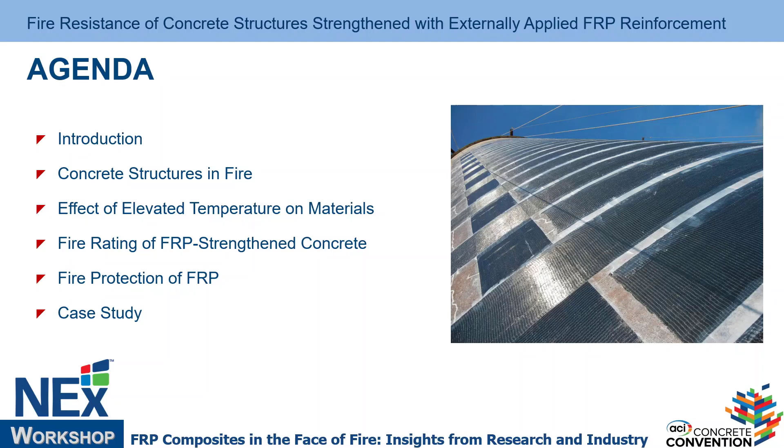And then I'm going to talk about the fire protection of FRP. How do we achieve that and what kind of evidence do we have for that? And if time permits, I'll do a quick case study for a project I was involved with that included fire protection of a structural element strengthened with FRP.

So now, why are we talking about fire today, right? Because fire is an issue, right? It's being considered as a structural load. And if you look at the statistics—this is only looking at approximately 10 years, and I think there are more updated reports that include last year as well—you can see almost every year for the past 10 years, we get close to 500,000 structural fires. Out of these, we get close to 3,000 deaths and injuries. And the cost, on average, is really 9 to 10...

Actually, if you look here, you can see the effect of inflation, right there.

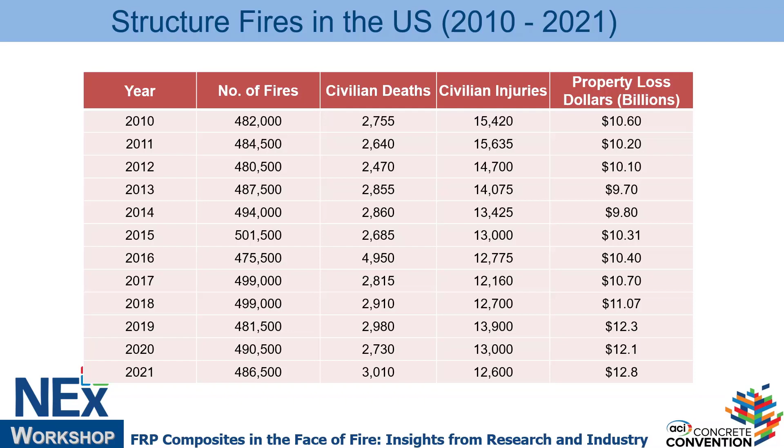But fires do happen, and do happen to structures, and over the years we've seen many of these fires. The good thing is concrete, as was mentioned earlier, is very good when it comes to fire. It has good fire resistance because it has inherent properties of providing insulation to the internal steel reinforcement.

Some of these major fires you probably heard about over the years: the Windsor Building fire occurred in 2005 in Madrid, Spain. It's a 32-story tower, and when the fire started around the 21st story, it lasted almost 24 hours. In those 24 hours, the only collapse you see in this photo is this part. One-third of the structure was made of steel, a steel frame. So the steel structure failed, but the concrete structure did not fail. I'm sure the structure was severely damaged.

Another major fire event is the Address Hotel in Dubai, an upscale hotel near the Dubai Mall. The fire occurred a little after 9 p.m. on December 31st, New Year's Eve. I remember it was in the news that year, and I got texts from people I know there—we have an office in Dubai—about the fire. It also occurred around the 20th level, between floor 16 and 20. It was an external spotlight, and a spark from the electric wire attached to it started the fire.

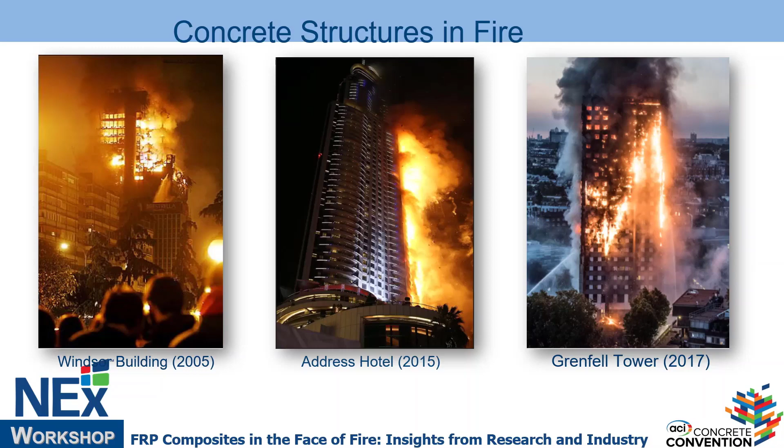So historically, concrete structures have been very resistant to failure during fire events. I think sometimes we underestimate how much fire resistance we get from these structures, and the calculation approach we use is relatively conservative. The only collapse I've seen over many years—I've done several investigations—every year there are two or three fire investigations I get involved with, as part of my work in repair and strengthening of structures.

Buildings, bridges, industrial facilities—I've only seen one failure due to fire a couple years ago, but it was a precast, pre-stressed element, so a less indeterminate structure. With bearing and corbels, once one element starts falling apart, you may get collapse. I'll show later that pre-stressed reinforcement in general is much more susceptible to fire, and I think this morning someone showed that relationship as well.

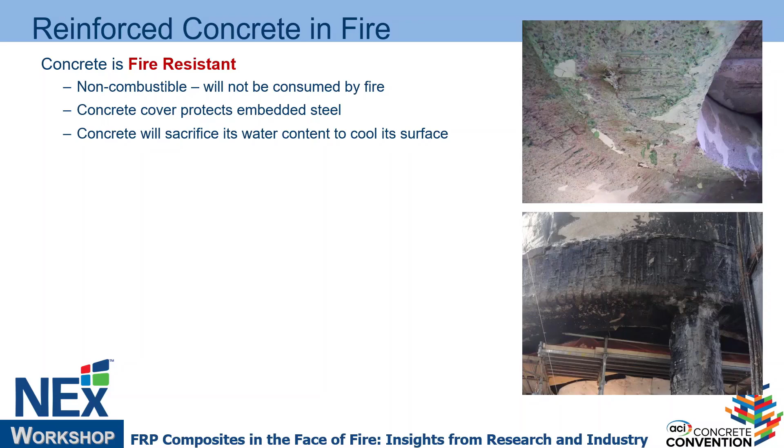So what happens in concrete? We said concrete is a very good material—durable, non-combustible, provides good insulation to the internal steel reinforcement and the core of the member. It can resist high temperature by sacrificing some of the moisture inside the concrete, some of the water used to create it, which starts falling apart. During fire, the concrete absorbs heat and changes the water into steam as it evaporates. That's a transfer of energy, consuming the energy that way rather than falling apart.

As the temperature rises, we can see the steam start building up. This morning we were talking about high-strength concrete versus normal-strength concrete.

As Steve Szoke showed in the video, about the explosive nature of high-strength concrete - it's so dense that moisture inside cannot get out. This creates so much pressure that it explodes the member. I've seen these tests over the years where high-strength members can explode under high temperature.

How do we address that? We put fibers in the high-strength concrete, polypropylene fibers. There was a question: how does that work? Well, these fibers, with elevated temperature, will basically disappear, burn, and create tiny micro chimneys that vent the hot steam from the element and reduce that pressure.

That's how they can last. But as the concrete starts losing moisture, it chemically changes and degrades. But degradation doesn't mean it's doing nothing - it's mostly just sitting there. If it didn't spall, it's sitting there providing insulation to the internal reinforcement. That continues until the temperature is so high that you get spalling.

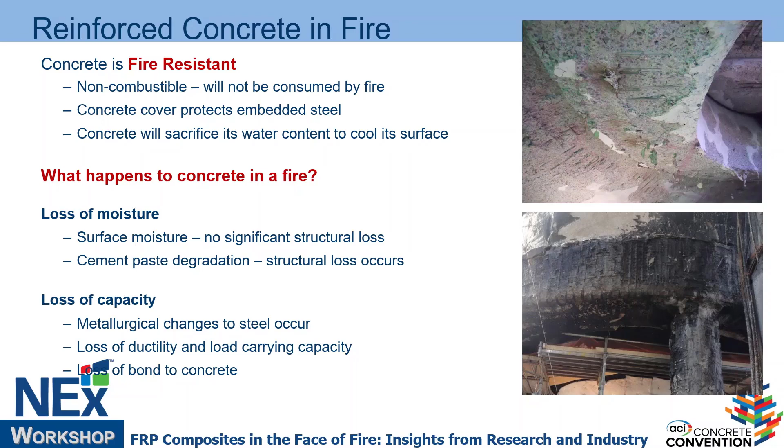We design based on what we call UL tests for service. I'll show you the fire load combination - ACI 440 for external strengthening and ACI 562 code. It's really based on a ratio trying to represent service conditions with dead and live loads.

Here are some of the fires I've been exposed to. You can see the damage is really not uniform, because fire is a function of the fuel. When you have concentration of heat, some locations may get significant spalling, other areas may see no spalling. So it varies a lot, and I think that's why concrete structures sometimes can last - the damage is not uniform. Some areas may still be adequately anchored and can last very long.

There's moment redistribution and different effects that give us some resistance. Plus, we don't have the full live load - even in regular days, we never really have full live load on a structure when we design for service.

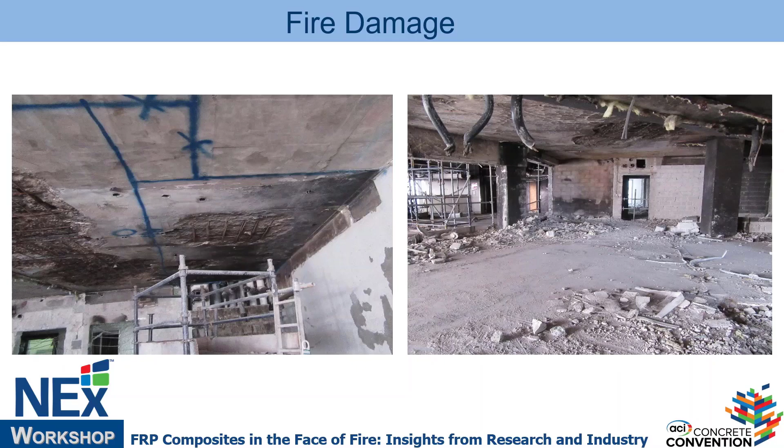But between these photos, one thing that's common - in most of these fires, the damage is more severe toward the top side. Why? Because heat rises. If you look at most of them, the floor is in pretty good shape. Actually, I've seen many structures where there's significant damage, but the floor is relatively in good shape.

This is actually in ACI 216 right now, which clearly states that the top side is not sometimes as critical as the underside. I mention this because it relates to something we do with FRP.

With FRP, if we want to do fire protection on the underside, we can easily apply spray material or boards. On the top side, it's not easy to fire protect FRP, because fire protection is typically a soft material, which doesn't make sense to apply on the top side, plus there's a change in elevations.

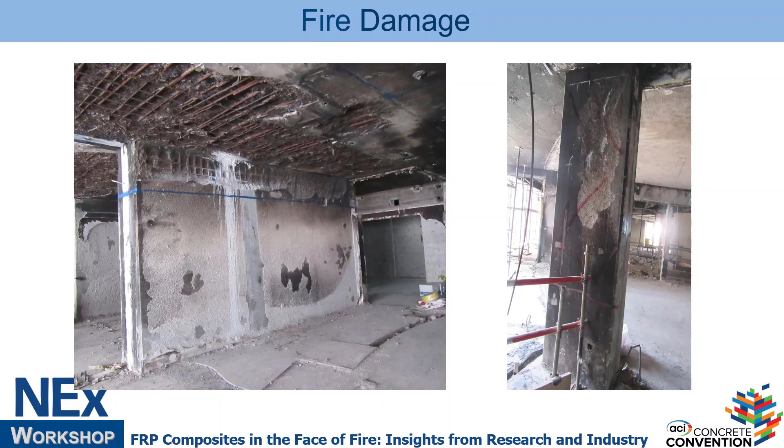I've seen many cases where building officials, based on ACI 216 and general knowledge about fire, accept that fire protection be limited to the underside, not required for the top side. Of course it differs between building officials, but you can see that's getting more acceptance now.

Another part, which I'm not going to cover, but typically when there's fire damage, before you can go back to the structure, you have to do an investigation. If FRP exists on that structure, we typically assume it's all gone.

It's doing nothing, it disappeared. So part of the repair is basically addressing this damage, and you may still have to do repair and strengthening again if you want to go back to the same load level.

There's a lot of details for the assessment part. Chapter 10 in 562 talks about fire, and we included both investigation after fire and describing that investigation. We're going to elaborate on it, but typically what you do after the fire is try to identify the extent of the fire damage, the depth of the fire damage, and the material properties.

Some basic things: you can do hammer sounding to see how far the delamination extended into the concrete, because sometimes the concrete looks good, but due to expansion of steel reinforcement, you get separation.

You can do a drill probe, where you basically drill vertically, and when you start hitting resistance, that tells you the depth of the damaged concrete that needs to be chipped and removed.

You can take samples of the steel and test them to verify residual capacity if you're planning to keep the steel. And you can do cores, take cores and do petrographic analysis to figure out the depth of the damage if you want. Although in my experience, just simply doing the sounding and the drilling can give you very good indication of the depth of the concrete damage that you need to address.

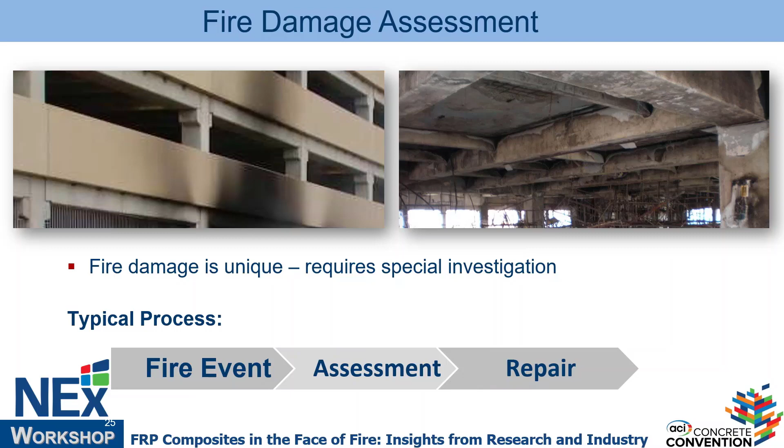Okay, so let's go back now. I said we're going to try to connect the dots in my presentation and see how we deal with this issue of fire and fire protection of FRP reinforced elements.

ASTM E119, the standard fire curve that we use. I apologize, I know I'm going to be mixing units because anything related to fire is most of the time based on international units. In the US we sometimes convert some of these. I'll try as much as possible to provide conversion, but sometimes you just need to look at the relative value and focus on the concept, because some of the stuff here isn't 100% detailed, but I wanted to use some figures to explain concepts.

So this is ASTM E119. There's the ISO curve used in Europe, very similar to this. Canada uses a similar curve. I think someone this morning showed a presentation on this - it's considered relatively on the conservative side, almost like an envelope.

So that's why with E119, it's really very unlikely to get exceeded. It can exceed it if you have too much fuel - it's not absolutely conservative, but it's conservative most of the time for typical structures. You can see here, I mentioned earlier, within 7 minutes you can hit 1,000 degrees - that's the standard temperature in the fire. And if you have something external, it may ignite if this temperature exceeds its ignition temperature.

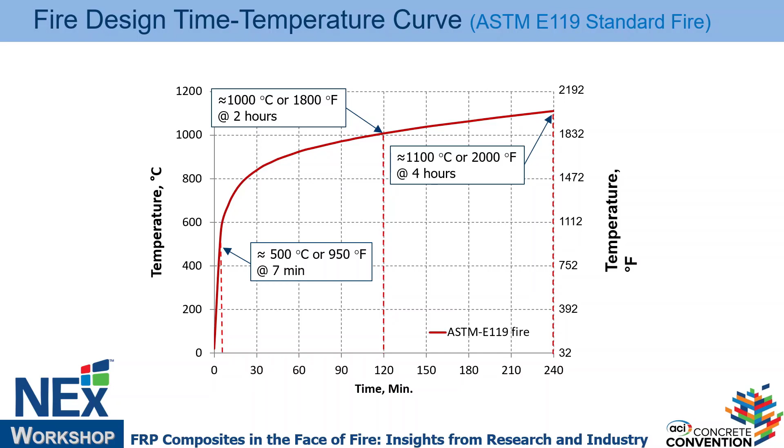At 2 hours, 120 minutes, close to 1,000 C, which is 1800 Fahrenheit, and after that it really doesn't increase significantly, going to close to 2000 Fahrenheit or 1100 C by 4 hours. I think there was a description this morning, probably Steve, who said that most structures require between 1 and 2 hours, which is true. It's very rare to see a requirement for 3 hours - some elements or structures may need it, but typically it's 1 to 2 hours. 2 hours is what most architects put on structural drawings, sometimes even without checking the code.

So what happens to the materials? We're going to look at how they behave, and then try to take all these data points and connect them together to understand overall behavior.

This is something I listed here that comes from Eurocode. This is an older version, so I don't know if they've changed it - I hear from our colleagues in Europe that they keep changing it, there's a new version. However, look at the concept here: at 20 degrees C, there's a certain behavior.

Oh sorry, this is the concrete. We start with the compressive strength, you get to the peak - this is what we call F prime C - and then after that you get failure. As the temperature rises, the compressive strength starts falling apart - you lose strength, you lose stiffness of the material.

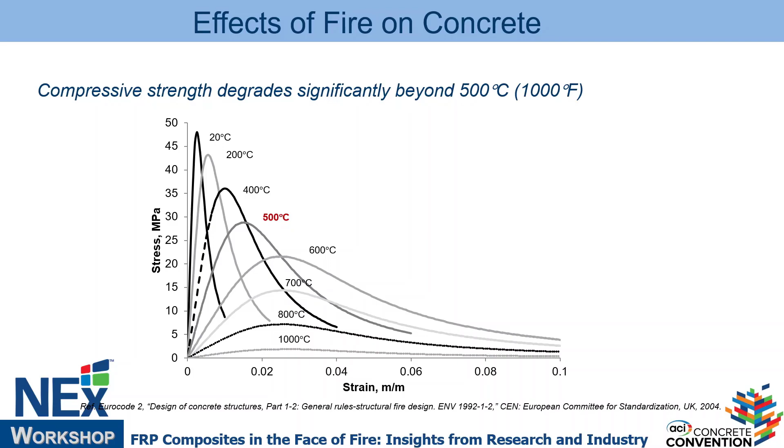So that keeps happening with the concrete, and there are different curves used to represent that. This is the curve I'm going to show next, from ACI 216, and this is going to change a little bit because, based on my experience, I've seen evidence that concrete starts degrading at a lower temperature than what's shown here, which is close to 500 C. At 200, 300 C you can see signs of loss of strength, and I think the new curve in 216 will show a little more aggressive loss of strength in concrete.

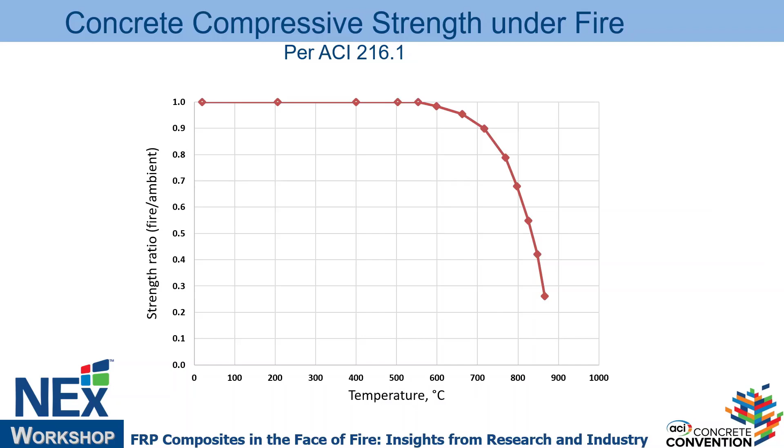That doesn't mean when I have that temperature that the entire cross-section of the element is falling apart. It depends on the temperature. So if, let's say, the outer 1 inch or 25 millimeters of the concrete reaches 500 degrees, that means only that outer inch is not contributing to strength, not the entire section. And that keeps going with time. So the temperature profile through the cross-section is important to understand, because it gives an idea of what level the remaining residual section has adequate resistance during fire, and which section is falling apart.

Now let's look at the steel bar, similarly. I know it's a little aggressive, but assume a linear stress-strain diagram, and after that a plateau, and then there's a hardening I'm not showing here. This is the yielding, what we define as yielding, at ambient temperature close to 20 C.

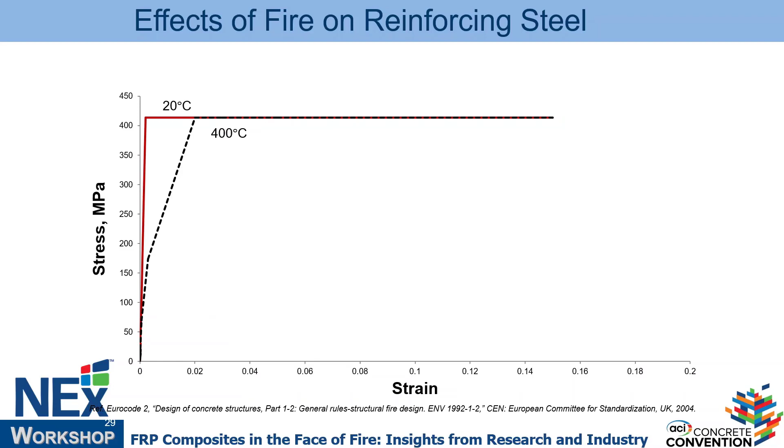Then it goes to 400 degrees. I start losing stiffness; strength doesn't degrade a lot, but then both strength and stiffness start dropping as I reach 500 C. The general rule is around 500 C plus or minus, or 1,000 degrees Fahrenheit, 1100 in some cases some people say, you lose close to 50% of the capacity of the steel.

Why is this considered critical? Because in general the assumption is 50% is the minimum you need to at least support the dead weight of the structure, so that's why it's considered relatively critical. Then at 600, 700 degrees you can see it start falling apart.

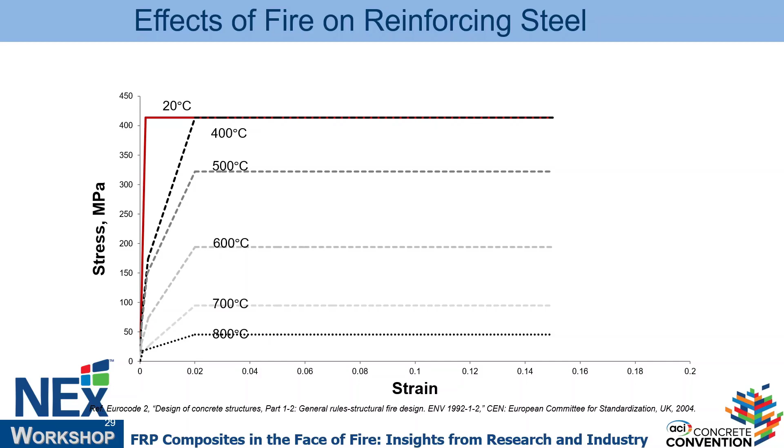If I take the peak of each of these data points and try to plot it again, I can get the curve that represents strength degradation with temperature. So this is percentage of the yield strength. Let's say it's 60 KSI, 420 MPa steel. Start there and start dropping as the temperature rises. This is mild steel reinforcement.

But what that tells me is if I have a tool or way to determine the temperature of the steel bars within my cross-section, I can determine the residual strength after 1 hour, 2 hours, or 3 hours. And if I know that, I can calculate the capacity after 1, 2, or 3 hours of fire exposure. So this is a very important piece of information. That's why 216 is updating all these curves, because you need them to do what we call rational analysis, rational calculation for fire rating.

And if I look at pre-stressing steel, it's a little more aggressive. Again, there are many different curves within different codes and research. This is just to represent the typical trend, because when we pull the high-strength steel, called a strand, let's say the 7-wire post-tensioning strands, that changes the molecular structure a little bit and makes it more susceptible to fire. Add to that, most of the time at service they're under stress.

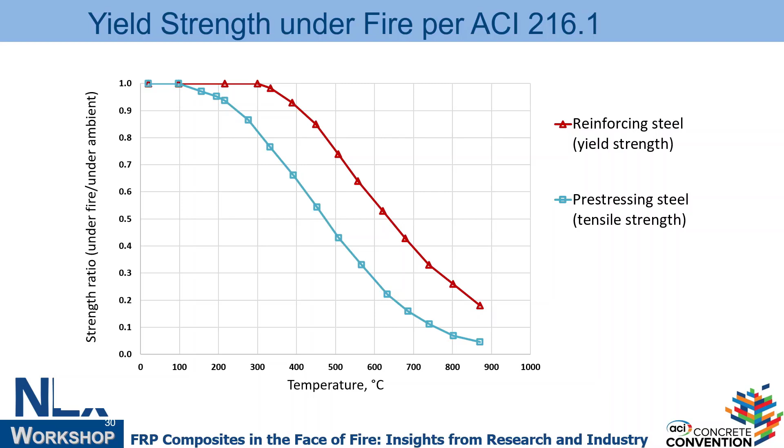It may not look significant, they're close to each other, however it is really a big difference. If you look at, let's say, 600 C, while the steel is close to 50%, the pre-stressing steel is close to 30% plus or minus. So that means it degrades much faster for the same condition. That's why, for me, I never understood why the concrete cover is the same for pre-stressed and reinforced concrete, because if I do thermal analysis, I'll find they degrade faster than this.

So what happens is I put all these elements together: concrete section, reinforced, exposed to temperature, the temperature rises with time. What happens is I lose the concrete outer layer by layer in terms of contribution. Steel bar temperature rises, so the strength keeps dropping, and I have the same level of load. So as the section capacity drops, what's going to happen is basically the stress within the member or the materials starts increasing to a level at some point.

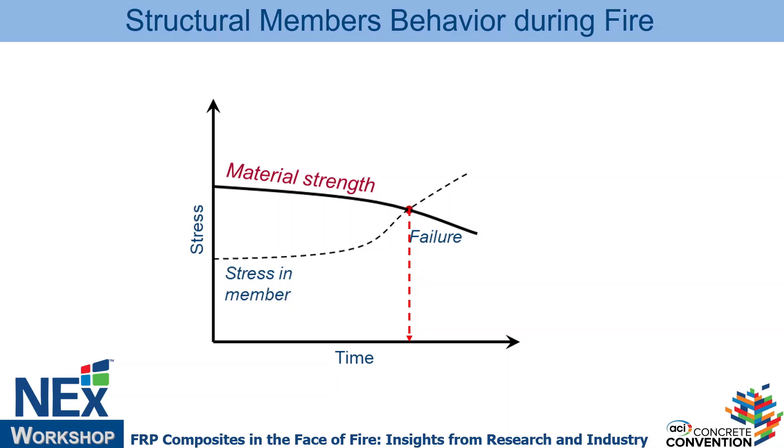The external load effect is more than the internal reduced capacity. In fire, we always talk about reduced capacity. At that point, you get collapse of the structural member. That point where it collapses is what we call the fire rating. So fire rating is the point at which the existing structural element will fail. That's typically what's referred to as fire rating.

Now, the good thing is steel recovers part of its properties after fire. I don't know what the new curve in 216 looks like, but this is some data I pulled from available references. You can see that steel, up to 600-500 degrees, after it cools down, gains back its strength, and most of the time it's above 70%. So in my head I always say, if I don't know, worst case I'll assume 70% unless we do some testing and verify the capacity.

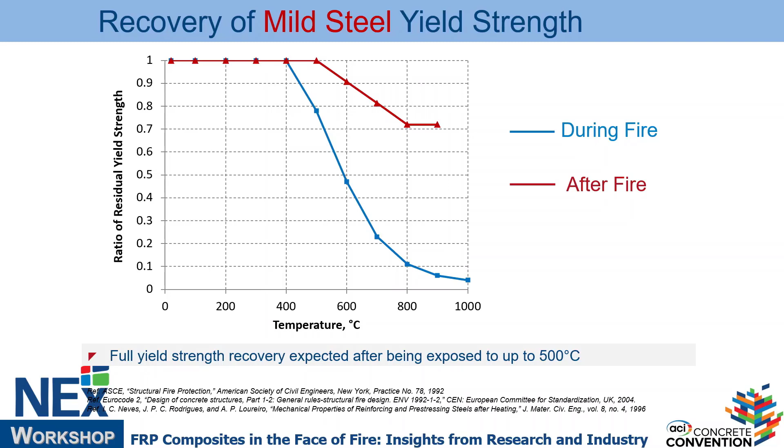So during fire it drops, and when it cools down it gains back strength. Actually there are some curves for concrete too. Even concrete, when it cools down, sometimes gains back some strength - it actually hydrates again, starts absorbing moisture from the air, and there is a strength gain. But that takes a year to happen. Most of the time, if there's damage, you start repair immediately - nobody's going to wait a year to figure out how much the concrete will gain. You immediately start chipping back the concrete and doing repair and strengthening.

Okay, so that was a quick intro to the general concept, and how I'm going to connect all these dots. Now I need to look at FRP - there was some discussion about it this morning, and I'm just going to try to connect these dots together. How many people here are familiar with FRP? Okay good, at least 50-60%.

For those of you who are not very familiar, FRP is fiber reinforced polymer. It consists of fiber woven into fabric, or just loose fiber. You can use carbon, glass - there's basalt fiber, there's aramid fiber, but these are the most popular for structural applications. These are mixed with epoxies where you saturate them on site and glue them to the surface to create this cured-in-place, high strength polymer, very durable, that increases the capacity.

That's ACI 440, and its mission is to promote and develop design guides for these components. There are also pre-cured laminates where you just put epoxy on it and stick it, similar to the concept of steel plates. Or there are anchors and bars that can also be used. This morning, Dr. Kodur talked about NSM, near surface mounted reinforcement - that's where you cut grooves into the concrete cover and then glue in the carbon bar, providing near surface or surface embedded composite reinforcement.

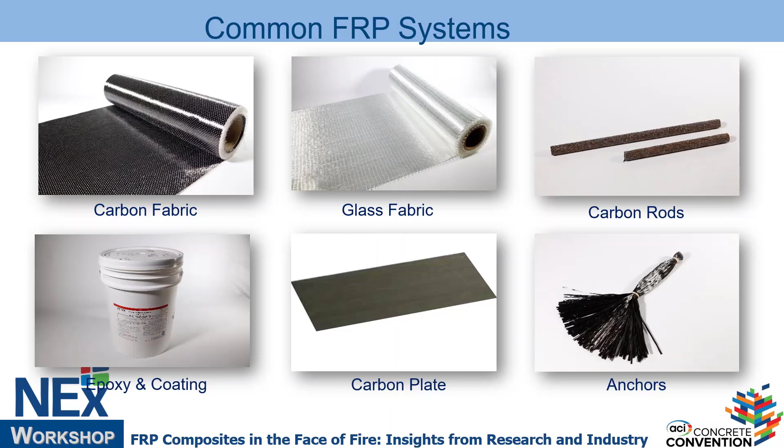So these are the materials - a lot of applications, right? That's why we're talking about it, because 20-some years ago it was considered new technology, even though it started almost 40 years ago. Development and research in FRP began in the 70s. Now we do them for seismic strengthening for walls, we wrap columns to increase ductility, shear strength, axial load, and use them around penetrations.

So this slab is planned to be cut, maybe for a new duct going through it, so they put FRP to reinforce around this penetration to control the cracking and make up for any loss of steel - shear strengthening of beams and columns by wrapping. FRP can be on the top side of the slabs or on the underside of the slab - they're all different configurations.

The nice thing about FRP, why it's gaining popularity, is that it's basically a flexible material that can easily accommodate any shape. You do not have to use heavy equipment or machinery to install it. And for repair and strengthening, it really doesn't add much geometry, so it's easy to hide and to protect.

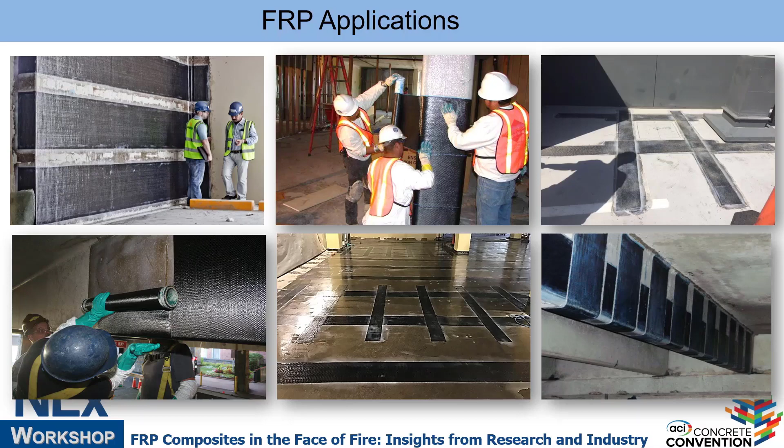So all these applications require evaluation of fire. If we look at the fiber, not the composite, just the fibers - the glass fibers and the carbon fibers that are used - if you look at carbon fiber, you can see it can actually go to 800 and even 1,000 degrees. It can turn red like steel and would not lose strength. It's very resistant to high temperature - it's actually made under high temperature.

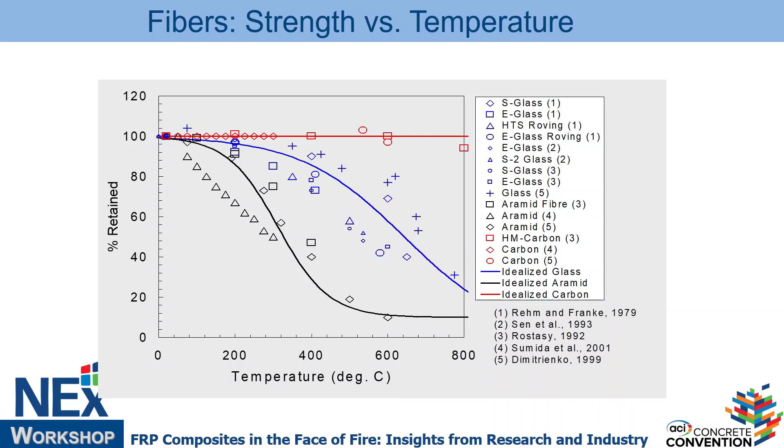If I look at glass, the fiber itself is actually weaker under elevated temperature. But this doesn't really matter, because we take these fibers and embed them in epoxy. The epoxy is the main component that transfers the load between the fiber and the surrounding structure, so the epoxy is the weak link. When I put these things into a polymer shape, the behavior will change, right?

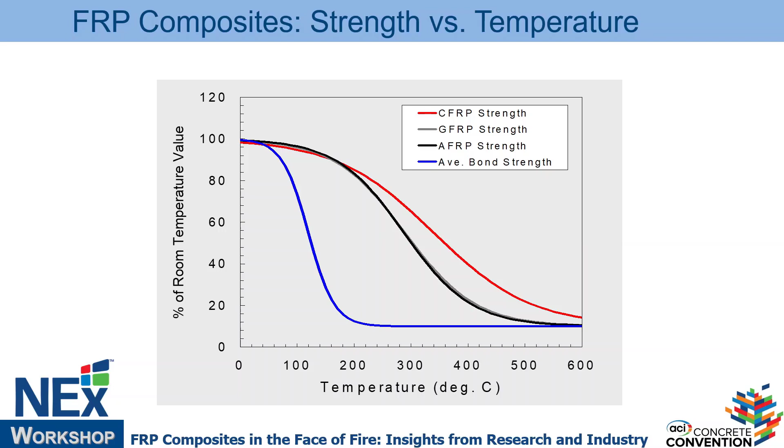We were talking this morning, Scott was asking, what is a critical temperature? That's really something we're trying to understand, because if I look at the behavior of the composite, it loses strength gradually. So is the critical temperature when it loses, say, 50%, somewhere close to 300-400°C, or is it something else? We keep talking about the glass transition temperature, but I agree this is not really a good definition for when materials start losing strength, because it's not a sudden drop in material properties.

Okay, so I learned this about materials, I learned this about the FRP. How do I apply this to look at the fire rating? ASCE 7, and currently also ACI 562. It's also going into ACI 440S, which is the code for externally applied FRP that's in progress.

There is a design limit or load combination for fire, which says during a fire, your element with its reduced capacity is supposed to support 1.2 dead, 0.5 live. If you have a roof, maybe you add another 0.2 for snow. Otherwise, you stick to 0.5 live. So during a fire event, I'm not expecting the full factored load.

When I compare this for anybody external, this is basically in the US. I don't know if it could be different elsewhere. I know other codes and standards, like New Zealand's, may have different load combinations. This could be 1.1 or 1.0, and this could be 0.7, but it's always close. Basically reduced, it's dead loads and some portion of the live load, because during a fire we do not expect the full factored live load on the structure. It's an extreme event, so we're trying to design for what is the expected load on the structure.

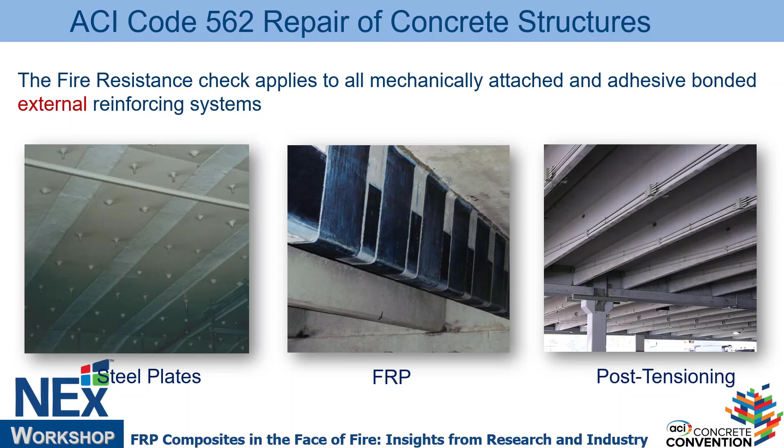I've run calculations for some columns that achieved 8-9 hours of fire rating. Basically, even if you increase the loads on it and lose all the external reinforcement, you still have adequate fire rating because it drops, but it's still adequate. Okay, how do we deal with FRP?

If I have FRP reinforcement, the steel strength will drop, so I need to use reduced strength of steel and reduced strength of concrete. Let's say I'm doing shear assessment, not just flexure. FRP, we ignore its contribution to strength. That's very clear currently in ACI 440 and also in ACI 562, the repair code. You ignore the contribution of the FRP.

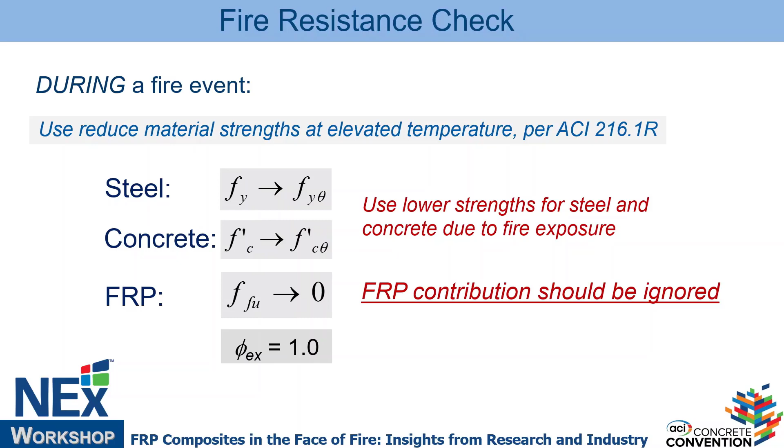Until we come up with FRP that has epoxy that can resist fire, we're going to ignore it. We're going to be super conservative. We're not going to look at critical temperature or Tg or anything else, and of course the phi factor, reduction factor of 1.0.

Okay, now I've learned the basics, and I know what I need to compare to figure out my fire rating. How do I run the calculations? We're going to go through this as a way to explain it visually. If I have a beam, I'm assuming simply supported beam, applied to uniform load.

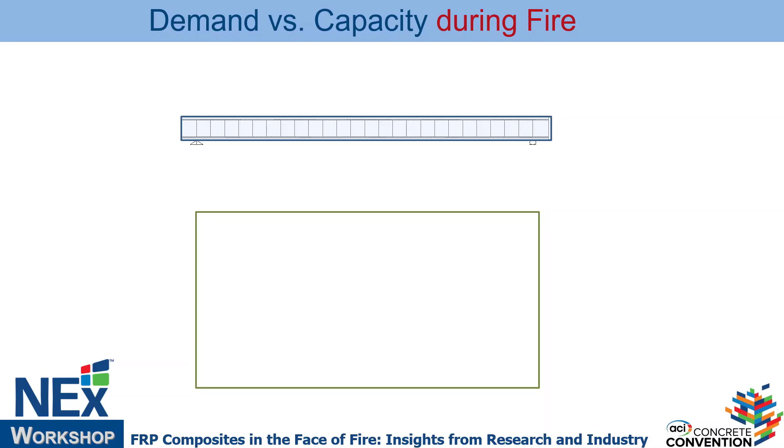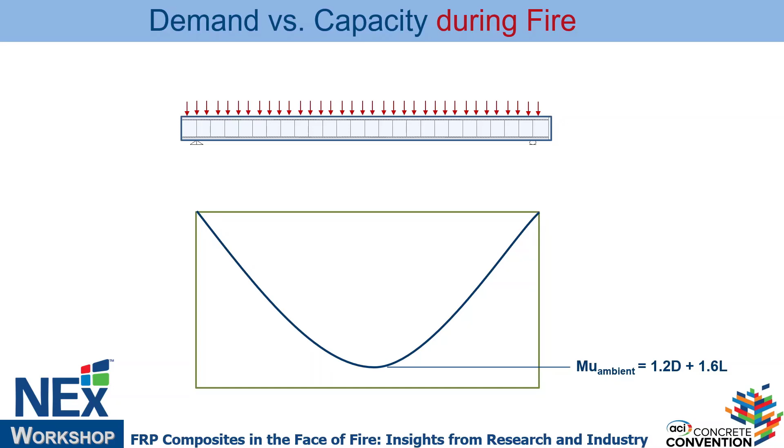So we know all what to learn from school, WL squared over 8, that's the maximum moment at midspan under factored load. I'm going to determine this based on the load factor. Doesn't matter which country you're in, you have your own standards and load combinations. This is the moment, factored moment diagram, applied to the member, maximum moment at midspan.

And I'm going to provide capacity, provide steel, and design it to give me capacity greater than this demand. Now, sometimes we cut down the steel a little bit, but I'm assuming I have the same amount of steel, so I have uniform capacity. Ambient temperature, this is what we design for every day.

What happens during fire is that the temperature rises. I lose, could be some concrete section, but more important for flexure is the steel - what matters is the steel temperature will rise, its yield strength will drop, so my capacity may drop.

However, I do not compare to the factored load, I compare to a different load combination, a lower load combination. So as long as my reduced capacity is greater than this load combination due to fire, and I have the benefit of the reduced load, and also I have no reduction on the material - that's another gain - this means I have adequate fire rating.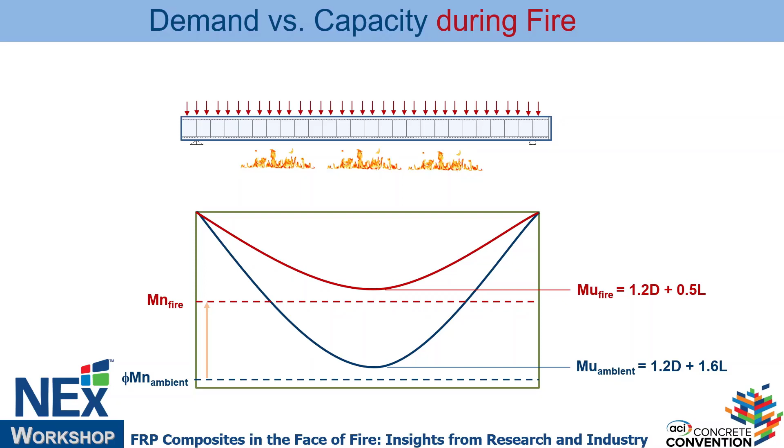But it doesn't happen all the time. If this drops, then I don't have adequate fire rating. Okay, how do I figure this out? That's mean to do this, I need to determine the temperature of the steel so I can figure out the strength of the steel, so I can plug it into my shear or flexure capacity calculation and figure out what is the capacity.

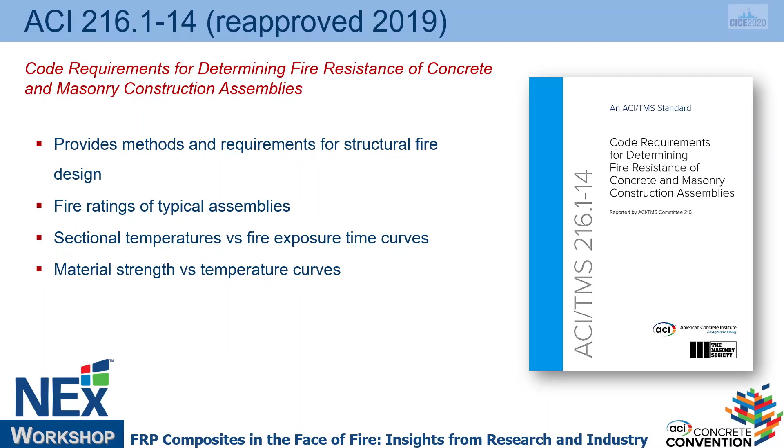We have data available in ACI 216 that can help us with this. It gives us the relationship between temperature and strength, and also the relationship with the temperature profile within the cross section. I'm going to jump to it and show you. This is one of the charts in the current 216. These are improved, and now we're adding calculations too - correct, Kevin? We're adding calculations that help you calculate the temperature, not just profiles that you can see.

So this is one of them. This is intended to be for a slab. I'm just going to use this for a simple example. Most of these charts are based on the distance from the outer surface to the centroid of the bar. We don't look at the cover, we look at the distance to the centroid of the bar - that is the depth of the rebar.

So let's say I have a slab and it's approximately 1 3/16 inch, 30 millimeters. At 2 hours, that means the bar temperature is probably close to, let's say, 1,000 degrees plus or minus, 1,030 shown there, or close to 550, 570 C. So these charts can help you figure out the temperature of the bar. I'm going to use that later on, so keep that in mind.

Another way to do it is thermal modeling. And I know we talked about this morning, and Dr...

Kodur showed all these models, but it's not that complex anymore. I just purchased thermal modeling software. You can just draw the cross-section, define the material properties, thermal properties, important to know.

Apply external temperature, could be one side or two sides, ASTM E119 could be a standard, and it will calculate for you the temperature profile at any time. I can model any beam within an hour, a couple of hours. It's not complex.

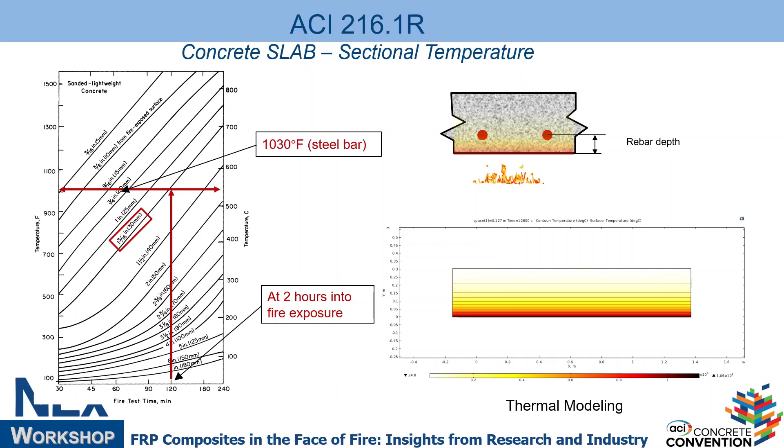This is another one. These are some of the charts for beams, for example. This is looking basically at a small section, let's say a small quadrant or quarter of the beam, that gives you, based on the time and temperature, the ability to figure out the temperature profile.

So if I have a bar, for example, at this location, it would be at 900°C after 2 hours, 120 minutes. So I have ways to determine the temperature of a corner bar, maybe middle bars.

I can also do the thermal modeling, applying the external ASTM E119 curve I showed you, which would tell me the temperature of each of my bars at any time - 30 minutes, an hour, 90 minutes. I can figure all that out pretty easily.

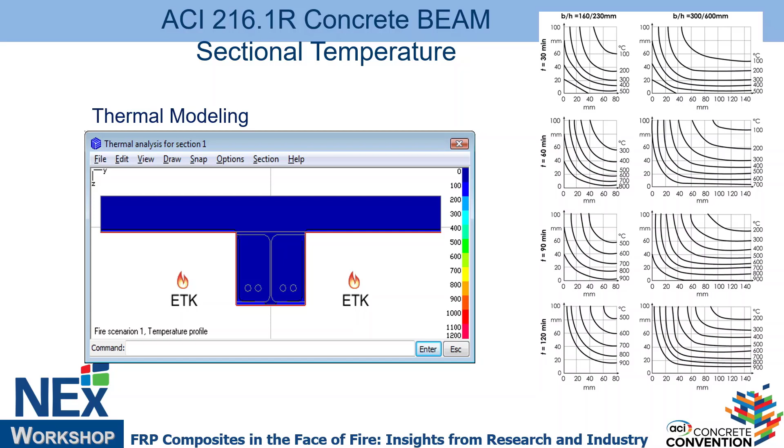If we understand the thermal properties that include thermal conductivity, specific heat, mass loss, density - if you get these parameters and there are ASTM standards to do them, then you can do any modeling or analysis that you need. I've done this on multiple different tests where they have data, and you can match them pretty good.

So this is to answer a question. Did Amir answer the question about how you transfer the information from a UL test to building officials? The idea is to move away from the concept that you have to do a test to verify the fire rating. We have the tools to theoretically calculate the capacity.

So we can simply run the model. All we need to do is convince the building officials that the models are adequate and can be used for analysis. That is the missing gap.

How are we addressing that? By working with 216, like 440 - I'm involved with 440, we're pushing 216, and 216 responded to the need of the industry, updating the guide to provide a relationship, and also working on a separate task group for a rational design document to describe all this and provide examples. And then this is going to 216.

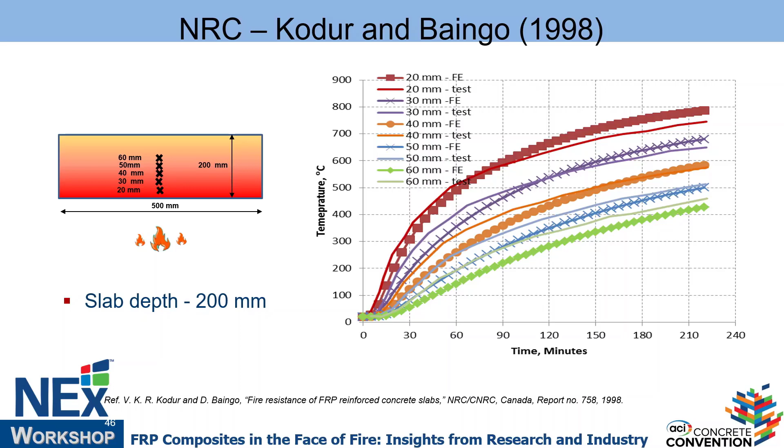With steel manufacturers, sometimes they test lots of elements. We cannot do that with concrete. We don't have a standard shape. It can be unlimited shapes because of the layout of reinforcement, the geometry, the concrete strength. There's no way we can do enough tests to cover all the potential applications for concrete.

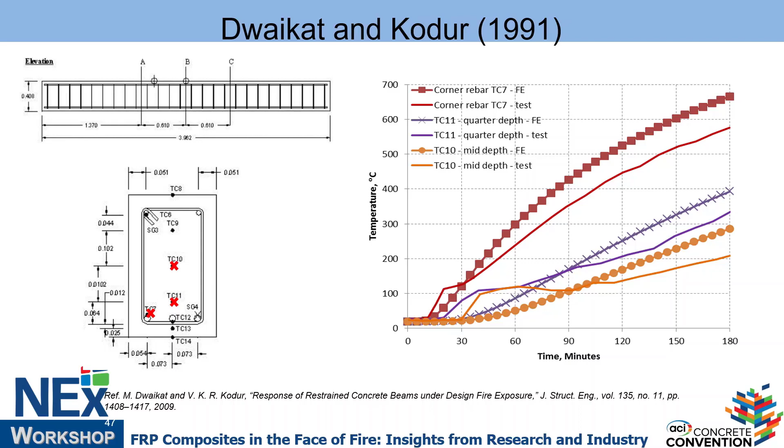There's another test also showing the same thing. Actually, theoretical is most of the time a little bit above and considered, at 1, 2, 3 hours, slightly more conservative, which is okay. For a designer, being slightly more conservative, I'm okay with that.

One thing I want to bring to your attention with this chart - this is a modeling for a beam, for a corner bar versus a middle bar. I think Dr. Kodur mentioned this: a corner bar is exposed to heat from two sides, so the temperature rises faster, which means it degrades faster.

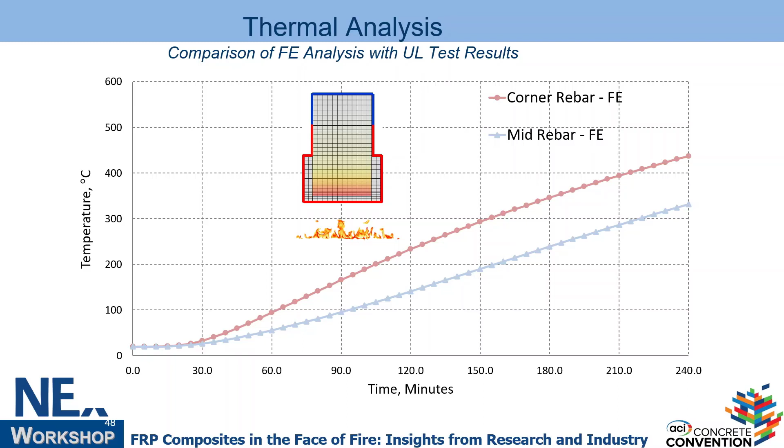While a middle bar, or really a bar in the second layer, is different than the first layer. So when you do your calculation, you have to determine the temperature of each bar and sum up each bar's contribution to the capacity. That's also important.

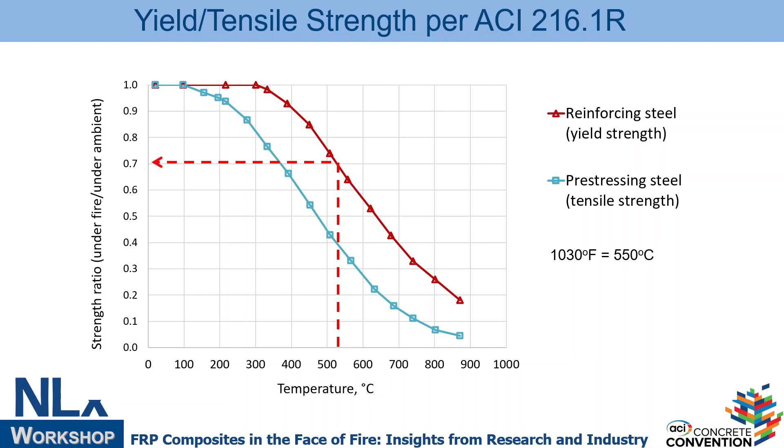So now, we looked at that slab, for example, and the temperature was close to 1,000 degrees. Now what do I do? I have these charts available in 216. Based on that temperature, I can figure out the residual capacity. If I started with 60 KSI, 70% is 42 KSI, or 420, 70% of 420 is 294 Megapascal. Now I know the properties of the steel and the concrete.

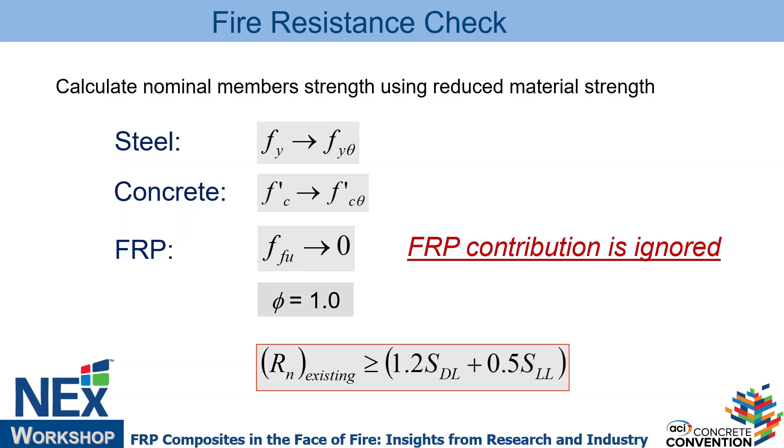I'm assuming if I'm looking at flexure, the concrete, even if it's a little bit weak, doesn't matter because the top is in compression and it's cold. It's not going to affect me a lot. Negative bending may be different. I'm just looking at the example with a simply supported beam. Ignore the FRP. I can run the calculation with reduced capacity, no phi factor, and compare it with the load combination, 1.2 dead, 0.5 live, and determine if it's adequate or not.

So this chart that we looked at, what if I do this without FRP strength, and I found that it's inadequate? Well, that means I need fire protection, right?

Now, why does this happen? Because there are two components to the equation: I have the capacity and I have the loading. If we're using FRP to repair, we're not increasing the load, so maybe sometimes it will pass. But if I'm doing strengthening, I'm adding dead load and possibly live load, or live load and possibly dead load. So I'm increasing the demand.

When I increase the demand, I lower the fire rating. That's why, within 440 and 562, we're thinking we need to address the fire, because when you increase the loads on existing geometry, you're basically playing with the fire rating. You're reducing it, and you have to address it somehow, and we need to run calculations. If the capacity I found is lower than the demand, load factor demand during fire, which is 1.2 dead plus 0.5 live, that means I need fire protection.

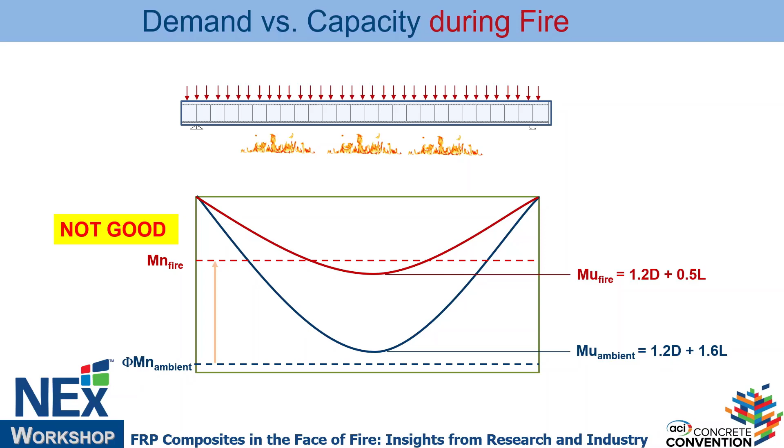Okay, how do I do that? Well, almost all manufacturers of FRP now have a fire protection system that was tested UL with FRP. This morning, Kodur showed the product that he tested for. We have systems tested for V-Wrap, Simpson has one, Sika has one. So it's now not something that is not available. It is available and can be used to address the fire rating.

It's either cementitious, most of the time spray applied. I think some of it can be troweled on. But the idea is we're using a material that has much lower density, so there's more air in it, more insulation, and that's basically going to provide protection. That protection is not aimed at protecting the FRP. It's aimed at protecting the steel and the concrete. That's an important thing to understand.

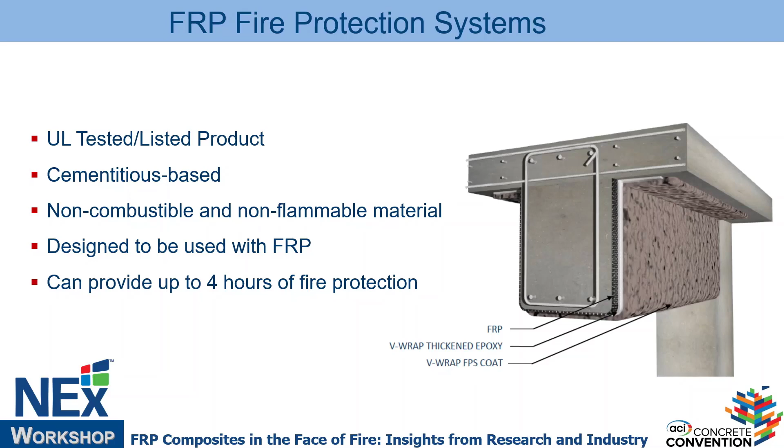And when we're doing the strengthening, we're doing strengthening and then fire protection of the system, not of any individual components. Sometimes people keep talking about fire protection and FRP - is FRP going to stand fire or not? We don't care, because the code says ignore its contribution. And that's what we're doing.

So, can I model this? Yes. If you do a test, ASTM standard test, on that fireproofing material to determine thermal conductivity, specific heat, mass loss, density, then you can go to any software, add an additional layer, assign it these properties, apply ASTM E119, and you can still calculate the temperature of the steel, which will improve with the fire protection.

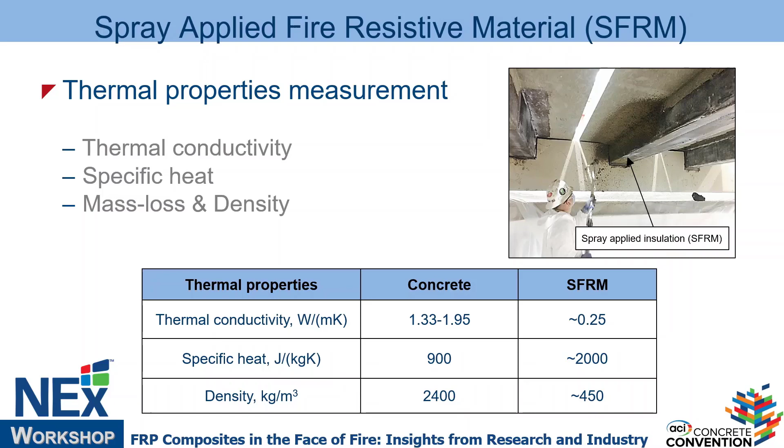This is one of the systems that we use, and you can see most of these systems have much lower properties. SFRM stands for spray applied fire resistive material. Thermal conductivity, you can see it's much lower. Specific heat is higher, which means you need more energy to heat the elements, so it's a good thing to be higher. And the density is much lower because there's lots more air in it, and air is a good insulation. Materials that provide insulation, like vermiculite and others, are embedded within it.

So here, for example, a test - this comes from a UL test - shows the temperature of the steel bar with and without fire protection. This is without the fire protection system, 600 C, this curve in the middle. While the lower one drops to less than half the temperature, 260 C. And that's what matters, because if I get this temperature low enough, sometimes I can even maintain the full yield strength after 2 hours and 3 hours.

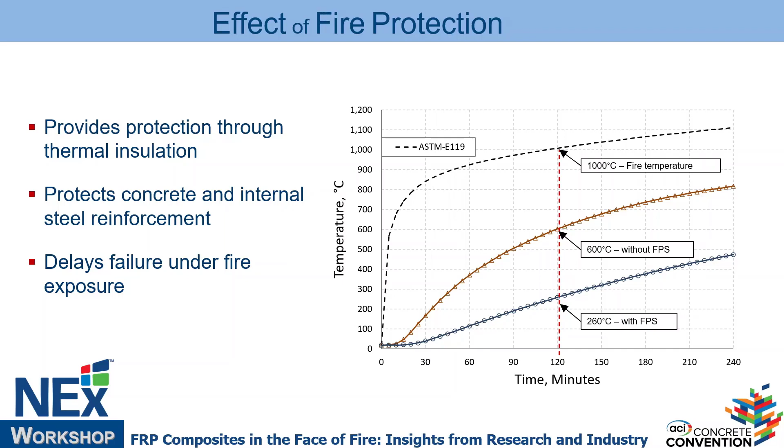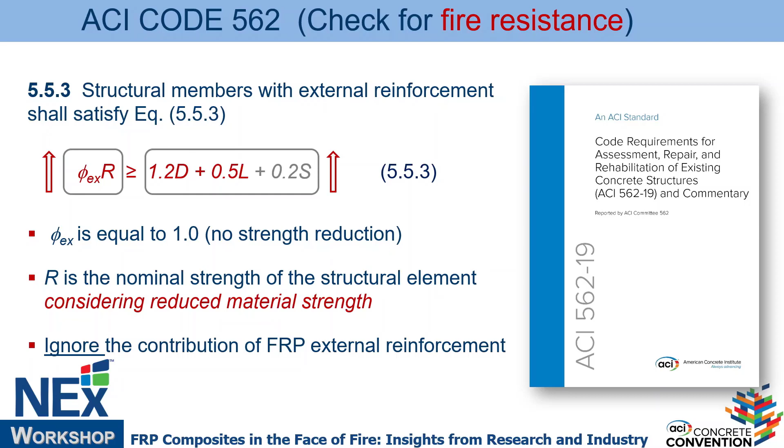With this system, you can see from most manufacturers you can get almost up to 4 hours of fire rating. It does work, because we're addressing the concept of protecting the elements. I'm basically increasing the nominal capacity during fire by protecting the steel and the concrete. But I have to keep in mind, even though I'm increasing the capacity, the demand may be increasing if I'm doing strengthening. So I have to check both sides of this equation.

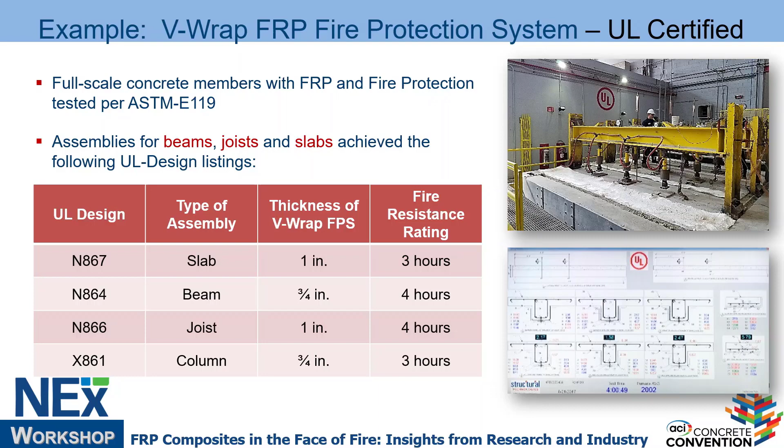This is one example, this is a system I mentioned. 1 inch, 3/4 inch can give you up to 3 or 4 hours. Some of these tests at UL, we actually instrumented them with thermocouples at the FRP location. The concept is we needed this as a data point to show building officials that we can predict the capacity. We don't need to do the test all the time.

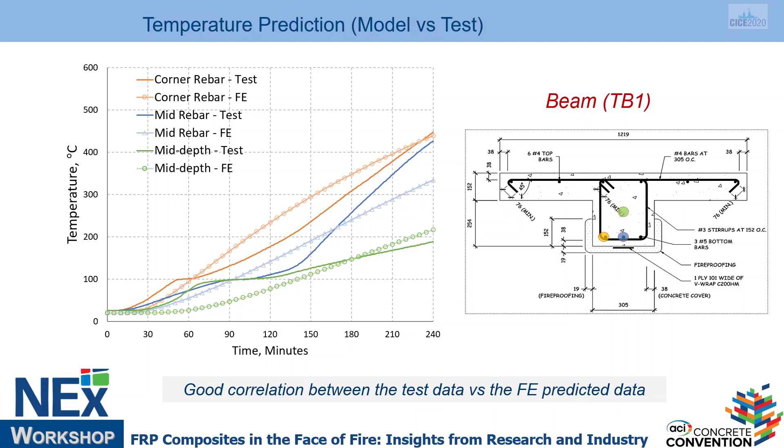So you can see here the thermal modeling, and again the lines are not exactly on top of each other, but relatively good accuracy. It's actually more on the conservative side, and we can use this to calculate the capacity. This is from one of the beam tests, to give you an example.

Again, I apologize, this is in US design values, but look at just the concept here rather than the actual value. I had the original capacity, 62, with the addition of FRP it was increased by 25% to 78. Then the fire load per E119 was 56, which we said corresponds to service. Service is roughly 70% of the ultimate, because if you look at load combination, US 1.2 dead, 1.6 live, assuming they are both equal, the average is 1.4. So basically the service is 1 over 1.4, which is roughly 70%. Of course, if you have the ratio of dead load higher or lower, that affects this ratio.

So what happened is that after the capacity was predicted, without fire protection it's 32. With fire protection, by modeling, it's 57. And the load was 56. So that means it would last 4 hours theoretically. And it did, it did last for 4 hours without failure.

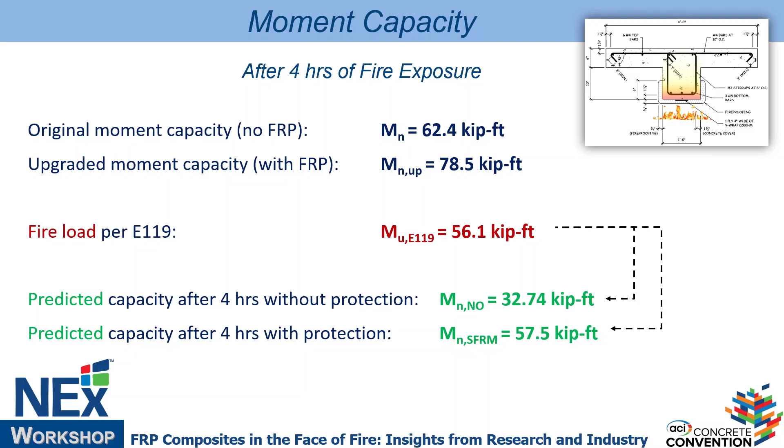Now, we don't know how far, because it's very expensive to do the UL test. Every minute costs a lot of money because of the amount of fuel. Once we reach 4 hours, it gets stopped. Could have lasted more, 5 hours, 6 hours, or could be just 1 minute after 4 hours. We don't know, but it passed. So the theory does work, every time we apply it.

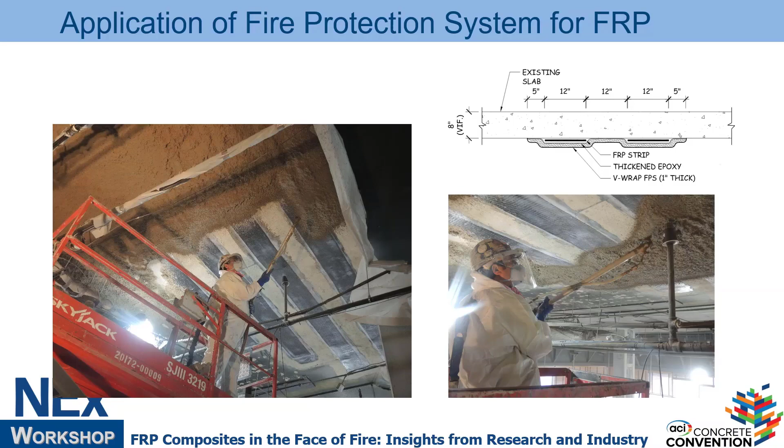Fire protection system, most of the time, it's mixing different cementitious components with water, and you can spray apply it. You apply it to the FRP. I mentioned the thickness between 3/4 inch and 1 inch, so it's not a significant change to the structural element, but it's enough to provide adequate fire protection. Here's some photos of elements that have been spray applied with fire protection.

Now, what if with all this fire protection I cannot make it work? Well, maybe then FRP is not the right solution in this case. One thing to mention is ACI 440 has a limit on the strengthening, to keep FRP as what we call supplemental or secondary reinforcement. That means we're only increasing the capacity by plus minus 40%, depending on the dead load to live load ratio. So most of the time we're not increasing the load significantly, and that's why if we have reserve in fire rating based on detailed calculation, it may be okay and you don't need fire protection for the FRP.

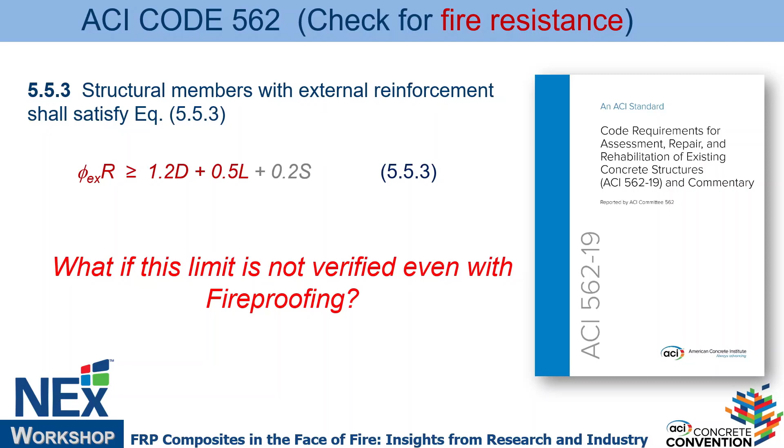But sometimes you find you need it. In these cases, if you exceed the strengthening limits, or if you cannot make it work, you go to the conventional solution: enlargement, add steel, roughen the surface, dowel in, form, and pump some concrete. We do this all the time. It's very, very common. We use external post-tensioning, many different techniques.

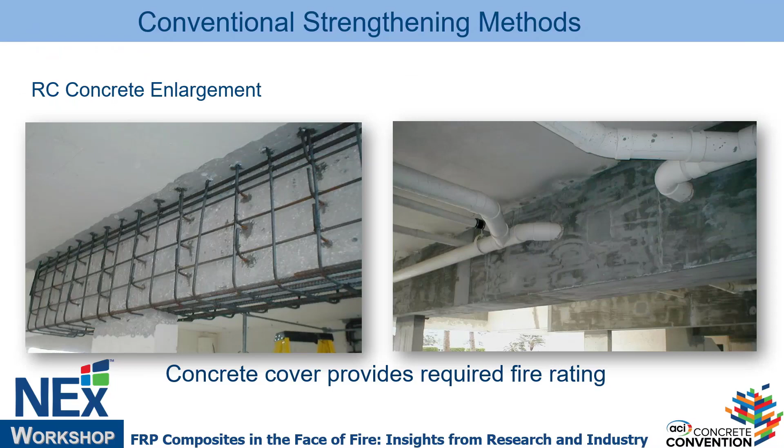Okay, so let me now show you an example of a project that we worked on with FRP strengthening. This project required strengthening, shear and flexure, the changing load, adding dead load, live load. The consultant specified the required capacity, increasing capacity, and said I need our fire rating, apply fireproofing everywhere.

Well, the owner, the university, said that's too much cost. Really, we need fireproofing everywhere, because fireproofing in practicality can double the cost of the repair. It's almost the same cost as putting FRP and putting fireproofing on top of it. You still have labor and work on every square foot, materials, etc.

So we said, okay, let us go through the analysis, and we talked to the building officials at the time. We said, this is the approach, here's the evidence. Are we going to run through this calculation, show you one by one, capacity versus demand after 2 hours? If it passes, we don't need fireproofing. If it fails, we'll apply fireproofing. Sure enough, we went through this, and by running the calculation, we found only 30% of all the elements require fireproofing. So it wasn't required for all of them.

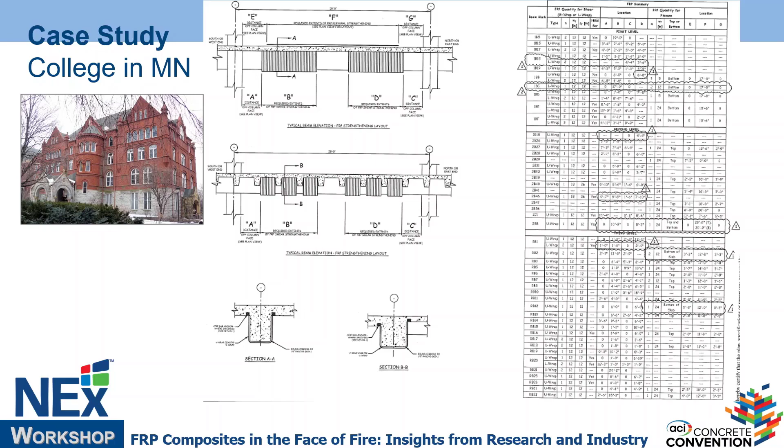But I want to show you a critical one that required fireproofing. This is an element with really small joists, waffle slab joists in some cases. The reason it was critical is because it only has 2 corner bars, and corner bars, as I mentioned, are more susceptible to heat because heat hits them from 2 sides, so their temperature rises quickly. So we were concerned with this, and sure enough, it did not pass.

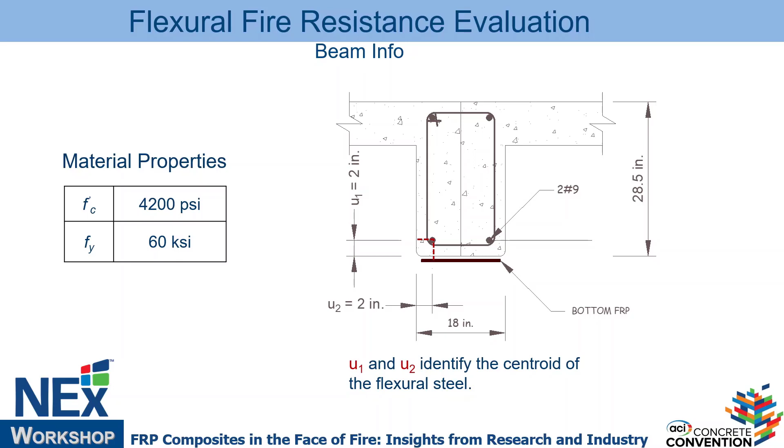You can see here, these are the dimensions. This is 28 inches in depth, 2 number 9 bars, and here the U1, U2 represent the centroid to the bar. So these are the properties, and again, I only have it in US numbers, so just look at the concept and the ratio of the strength.

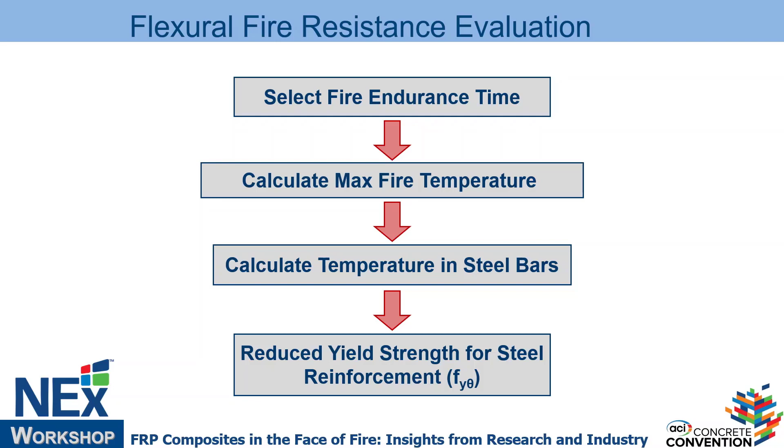And we went through the same process that I mentioned to you. We calculate maximum temperature, which is ASTM E119. We know what's the temperature at 2 hours. So we take that temperature and run it through either curves, through 216, or through modeling, and calculate the temperature of each bar, then calculate the yield for the higher temperature, calculate the capacity, and compare it to the demand during fire of 1.2 dead, 0.5 live.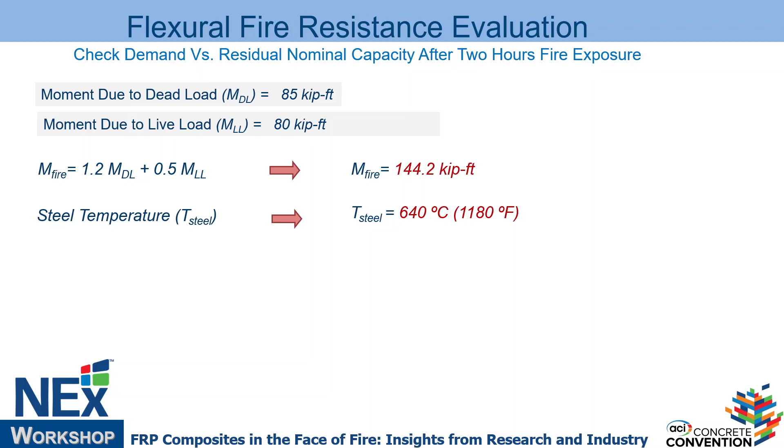So these are the numbers for that specific beam. The dead load was close to 85, live load close to 80. When you go through load combination during fire, the demand is 144 kip-foot that I need to withstand during fire. When we run the calculation for those bars, the temperature, you can see the corner bar rises to almost 1200 degrees Fahrenheit, 640 C. At that temperature, the curve is very sharp, and the yield drops significantly. So this is less than 25% of the capacity of the steel bar.

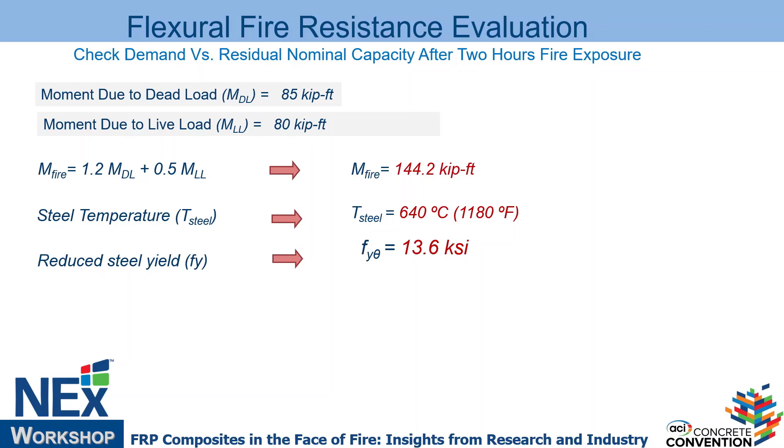So they would not really pass. And even if we ignore the FRP contribution, this would be the capacity, close to 60 compared to the demand of 144, which would not work. So this is an element that would not work.

So we did the same thing with fire protection, applied the fire protection, reran the analysis, and showed it would stand. I don't think I added that calculation with the fire protection to show the difference, how it reduces the temperature of the steel bars and increases the yield strength. Unfortunately, I should have added that, I was just thinking about it this morning.

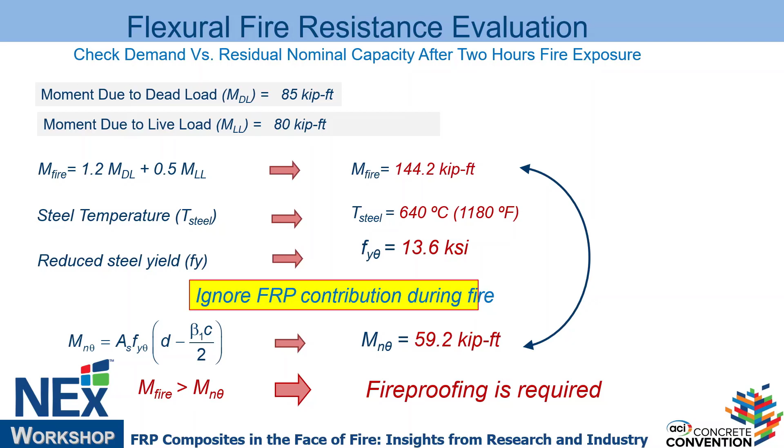So once that was done, for all these specific elements, this is before, wrapped with FRP, and then after it was sprayed with the fire protection. Fire protection, most of the product I know in the market, is gray in color, so it's more like a concrete look because it has cementitious material. So it would blend in relatively well with the existing structure.

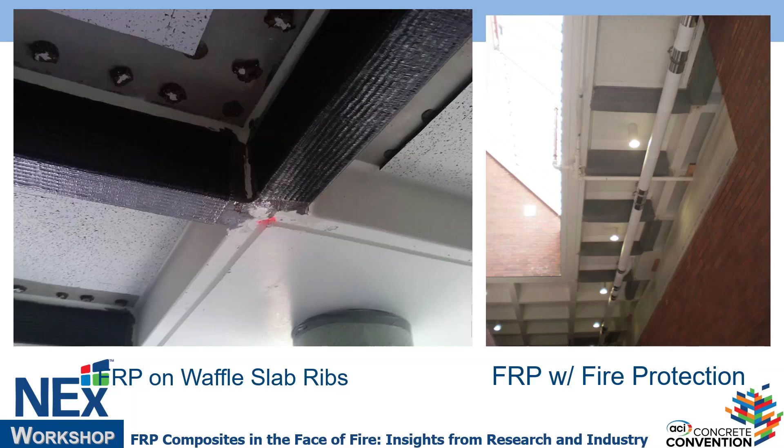Okay, so that's my summary for the day. I just wanted to make sure, I was concerned that people are going to talk about all different things, but no one's going to talk about the process. How would those who are doing engineering deal with this thing on day-to-day?

And this is the concept that 562, 216, and 440 is now pushing for: do evaluation, rational design approach. 216 is taking the lead on taking this rational design approach, putting it into a procedure with curves, relationships, and design examples to allow engineers to determine fire rating. So no one has an excuse not to use FRP because they say it doesn't have adequate fire rating. You can run the calculations.

Okay, any questions?